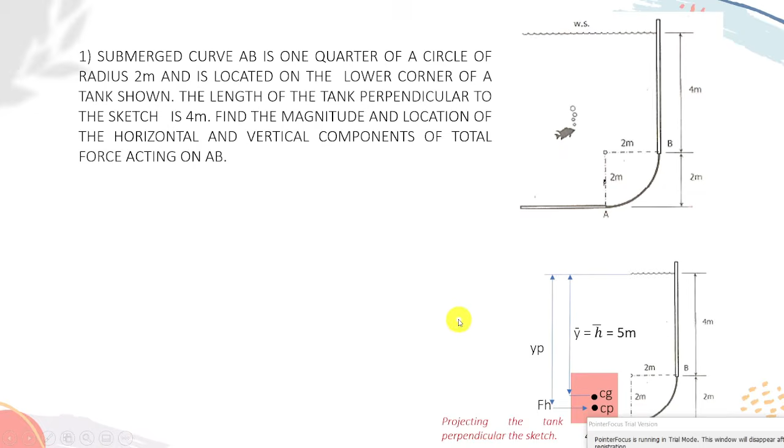For number 1, submerged curve AB is 1/4 of a circle of radius 2 meters and is located on the lower corner of a tank shown. The length of the tank perpendicular to the sketch is 4 meters. Find the magnitude and location of the horizontal and vertical components of total force acting on AB.

Ayan, tingnan natin itong figure. May isda pa, so ito yung water surface. Given naman na water, tapos ito yung gate na mag-act. And then, this is the curved surface of A to B, so that is a quarter of a circle, meaning 1/4 ng kabuuan ng isang circle.

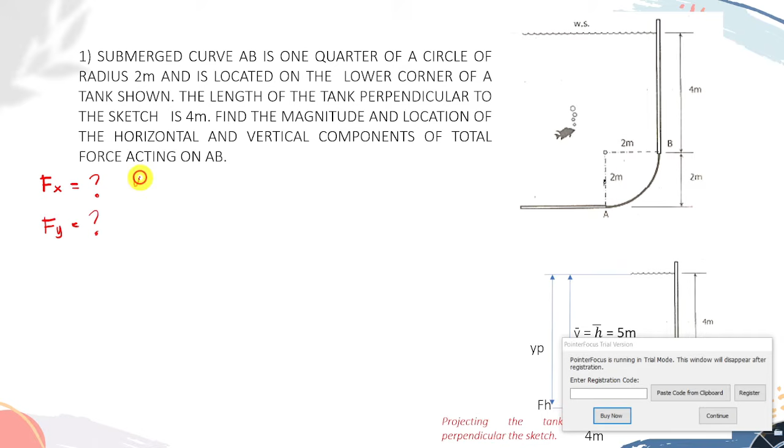So, ano yan? Isa-isahin natin ang hinahanap: the magnitude and location of the horizontal and vertical components. Therefore, nahanap ang horizontal Fx, vertical Fy, and the location as well. Sulat ko rin na hinahanap rin pala yung Yp saka yung kanyang x bar. Isahin natin.

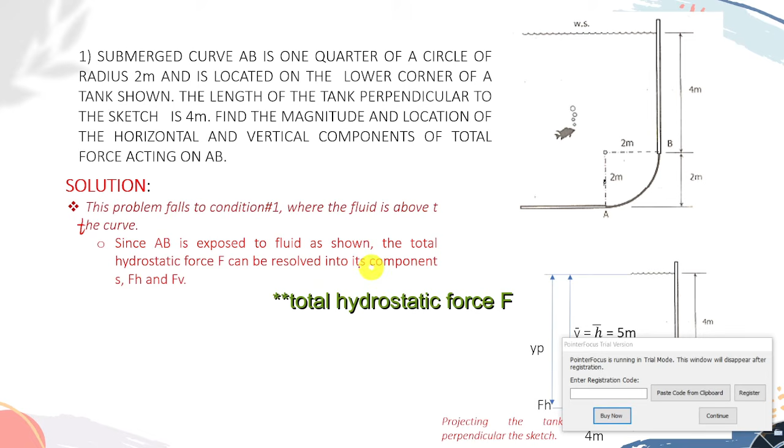This problem falls to condition number 1. Ano yung condition number 1? The fluid is above the curve. Since AB is exposed to fluid as shown, the total hydrostatic force can be resolved into its components, FH and FV.

So, ano yung condition number 1? Nasa taas, no? Nasa ibabaw siya ng liquid. So yung ating horizontal force na nag-act sa center of pressure, ang kailangan na muna nating unahin kasi mas madali yun. Diba? And later on, we will also get the vertical naman, ayan, Vertical FV or Fy in this case.

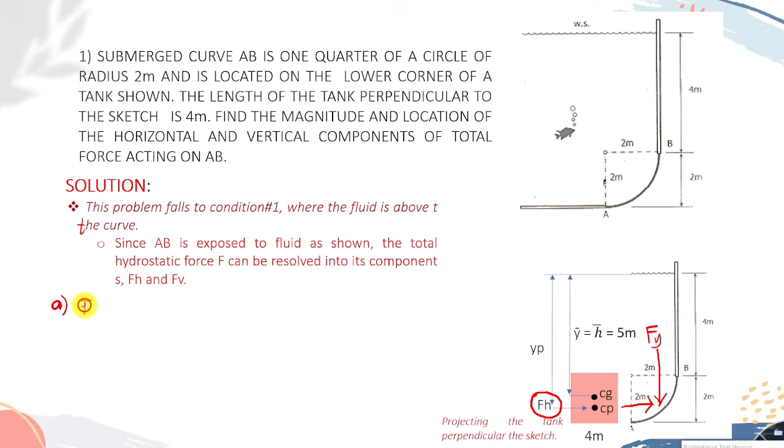So let us first solve for the horizontal component of the total hydrostatic force. Fx or Fh is equal to, yun lang talaga, basically yung gagamitin mo, gamma H bar A for horizontal. Step number 1 yun. Ano ang components niyan? We have unit weight, which is equal to 9.81 kilonewton per cubic meter. Saan yan galing? That is the unit weight of the water.

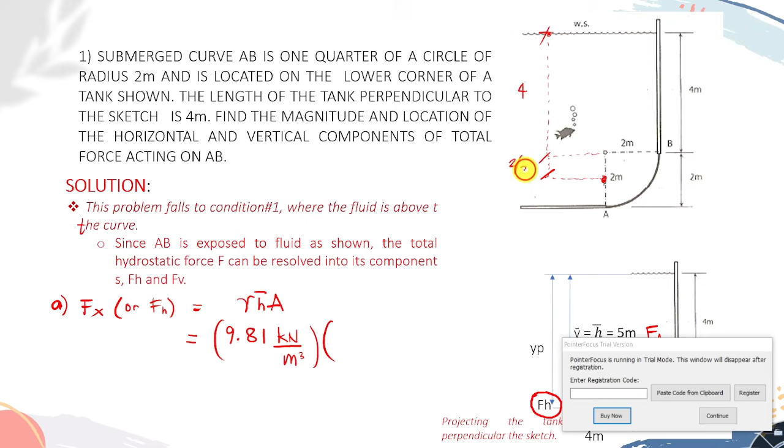Given naman the water, H bar. Now for H bar, again, H bar is the projected vertical distance from the water surface down. In this case, meron tayong given na 4 meter from water surface to B, plus, what is the projected centroid of that? Diba, rectangular lang. So ano ang kalahati niyang height na yan? That is 2 meter over 2, which is 1 meter plus 4 meters. So the total H bar is equal to 5 meters.

And what is the area? The area na i-consider natin is the projected, yung side view. Nagiven naman kasi na length of the tank is 4 meters. So, therefore, the height of 2 meters multiplied by the length of 4 meters. Yan na yun. So kung ipoproject ko siya isometrically, ganyan yan. Ang length na yan is the perpendicular to the paper, so 4 meters.

Now, to solve, calculating that, we have 9.81 by 5 by 2 by 4, and the answer should be 392.4 kilonewton, kasi makakancel out mo yung m cube divided by m cube. So ang matitira mo is a force, unit of force, 392.4 kilonewton. So yan is the horizontal pa lang, horizontal component of the force.

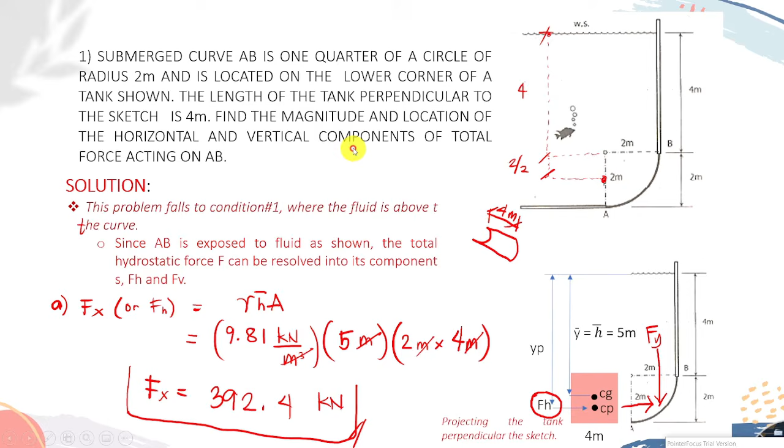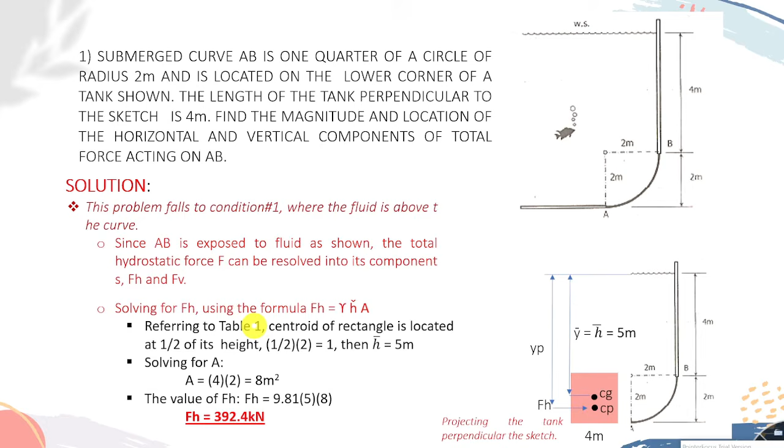Yan, basahin natin yung complete solution. Referring to table 1, centroid of rectangle is located at 1/2 of its height. So 2 over 2 is 1 meter. Then h bar is equal to 4 plus 1, 5 meters. Tapos, solving for area, we have 4 by 2 meters. And then the value of FH now is equal to gamma h bar A, 9.81 by 5 by 8, which is equal to 392.4 kilonewton.

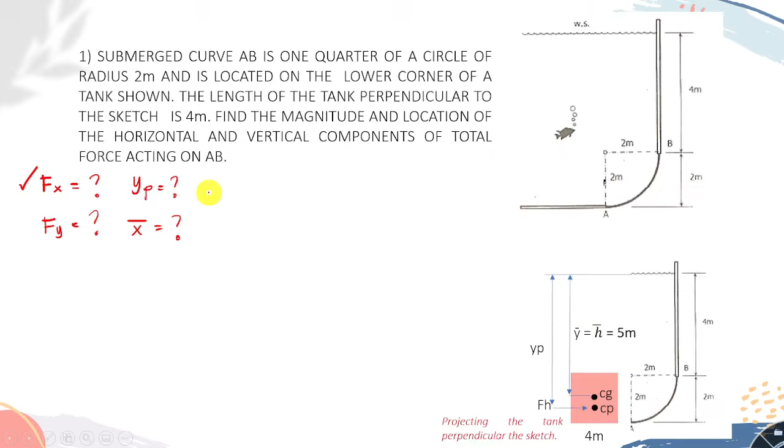So nakuha na natin kanina si Fx. Ngayon naman, hanapin natin ang location ng Fx na yan, which is also known as Yp. Solving for location of the horizontal force, that is, or Fx, ano yun? Yp ang hinahanap natin, okay, location. That Yp is measured from the water surface up to the center of pressure Cp.

Yan, yan yung projection niya, up. Nandyan somewhere yung horizontal force acting on the center of pressure. Now, to get Yp, we have to be familiar with, again, the formula for Yp from plane surface, y bar plus Ig over A y bar.

So yan lang. Ngayon, kailangan lang natin hanapin kung ano-ano ba yan. Ano ba yung y bar mo dyan? So in this case kasi, kapag project mo yung ating water surface to the center of gravity, Cg, projected vertically, ano makikita nyo? Parang yun din yung y bar niya, meaning 4 plus 1 meter, that is equal to 5 meter. Wala kasi siyang angle of inclination diba? So as is siya, na h bar is equal to y bar.

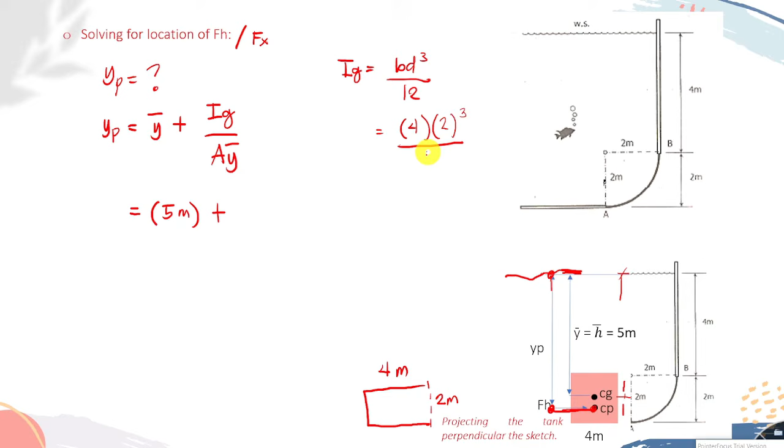Yan, galing yan doon wala nang tiginan ng table. So ang base mo dyan na kukonsider is 4 meter, while the depth na i-consider mo is 2, kasi yun yung height. So 4 by 2 cube over 12. Simplify ko lang, so 4 by 2 cube divided by 12 is equal to 8 over 3 m raised to the 4th power.

So i-substitute ko siya dito ulit, 8 over 3 m raised to 4 over, what is the area? The area you will consider is the area of the rectangle na yan, so that is yan, yung x niya. So 4 by 2.

And y bar, let me explain, is equal to... A y bar is 4 by 2 by 5 meters. So y bar is the projected parallel distance from the CG to the surface of the liquid. That's the 5 meters. Now we have complete values, let me just calculate. So 5 plus 8 over 3 over 4 by 2 by 5. Final answer is 5.07 meters.

That's the location of Fx, measured from the water surface to the center of pressure. That's y sub P.

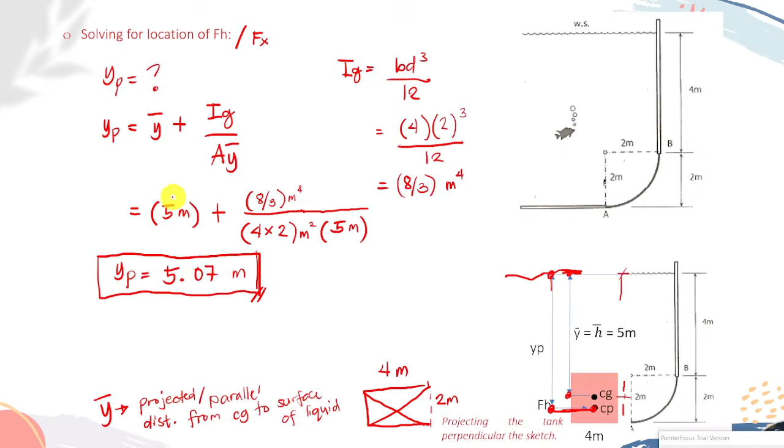Let's check. Okay, that's correct, right? So 5.067 - the location of FH is 5.07 below the water surface. So that's the first two.

Now, solving for FV using the formula. FV is the weight of water, since AB will carry the weight of the water above it. Again, this falls under case number 1, because the curve is above - I mean, the water is above the curved surface. So meaning, what it will carry as weight is the weight of the water. So no need for any imaginary things.

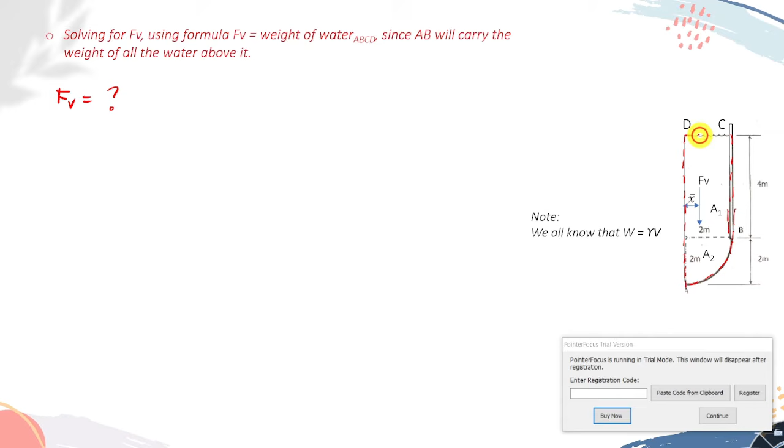So here, I'm drawing the projection of the water above the surface of the curve. As you can see, that one is the curved surface. Let me just write it down again.

So this is your gate - the shaded part, that is the gate from A to B. And I will project the line of the water above. So that's the volume we need to find.

So first, we have to find the area, from A, B, C, and D. Therefore, the vertical hydrostatic force is equal to unit weight multiplied by the volume of ABCD in the figure, as you can see. Okay?

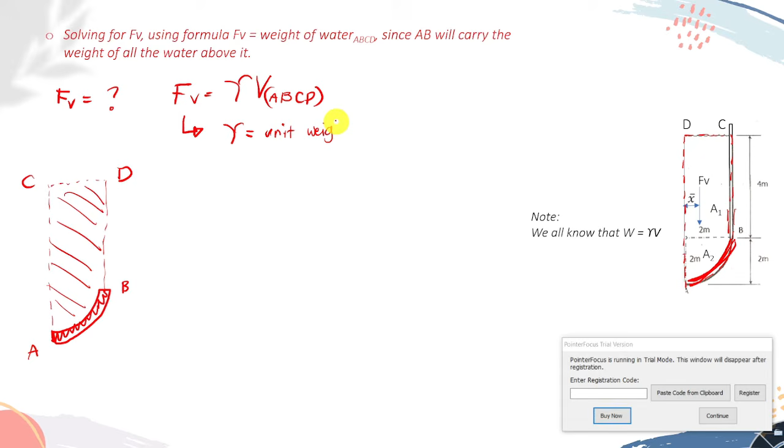Now we need to find the components. First of all, unit weight. Unit weight is a very simple given - that is the unit weight of the liquid, which is water, is equal to 9.81 kilonewton per cubic meter.

And then the volume of the said shaded area, that's what we need to find. We have a little problem here, okay? Volume ABCD. Now, to get that, here's another approach - can I divide this volume into 2 parts? Because it's hard to find when it's composite, right? So meaning it's comprised of two areas: area of a quarter circle and then area of a rectangle.

So I will put another letter, E. So this area, CDBE, is the area of the rectangle. Let me project it there. The length is 4 meters. Later I'll multiply by the length, because area by length is how you get the volume. There, it was projected like that.

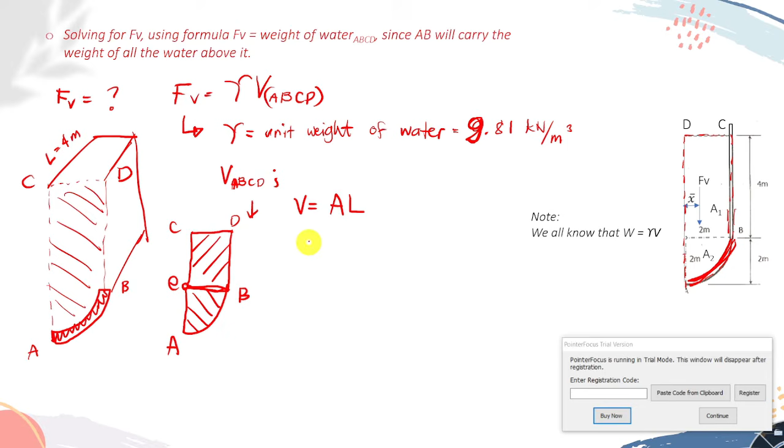So can I write that the volume is due to the area - the volume is equal to area by length. Now I will divide it into 2 parts again: area of CDBE multiplied by length, plus area of ABE multiplied by length. I divided it into two to make it easier.

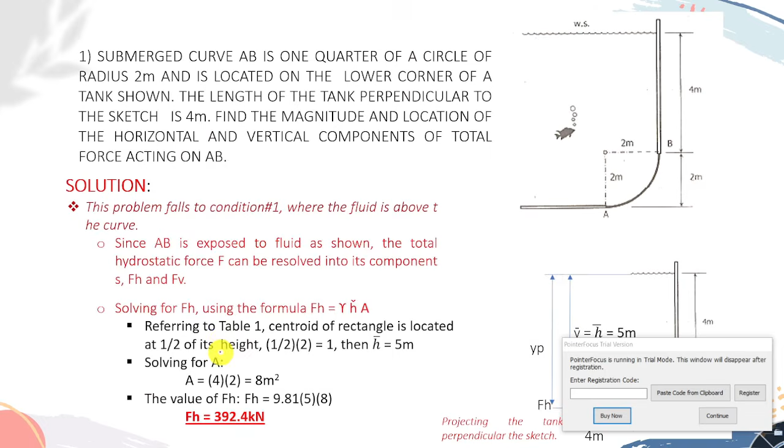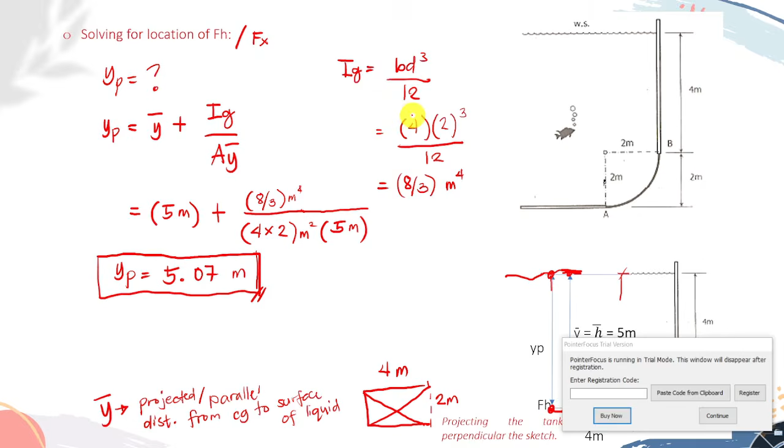Because we know the area of CDBE, that is the area of a rectangle, right? Yes, rectangle. And then ABE, from the problem, it's mentioned that this is 1/4 - a quarter of a circle. So meaning, quarter circle.

To make it easier to solve, let's dissect it into two parts to get the total volume. So what is the area of CDBE? The area of CDBE is a rectangle with height 4 meters and width of 2 meters. So 4 by 2 by what is the length? The length is perpendicular to the paper - that's 4 meters. So if you look at it in 3D, that's the hidden side.

And then, to get the area of ABE, we have to find the area of this quarter circle. What is the area of a quarter circle? Simply, that is pi r squared divided by 4 - the area of a circle is pi r squared, so if you divide that by 4, that's the area of the quarter circle. Multiplying that by the length of 4 meters again gives us the total volume. The volume of ABCD is equal to 4 by 2 by 4 plus pi 2 squared over 4, times 4. Now the total volume is 44.57 cubic meters. That's the volume.

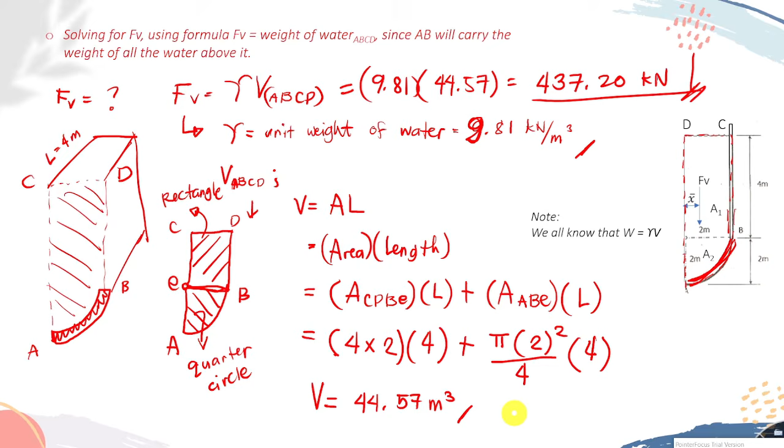Now we have the unit weight and we have the volume, I'll just multiply them together. So 9.81 by 44.57 cubic meters, we now get the total vertical force of 437.20 kilonewton. So that's how simple it is, right? You just have to find the area and the length, or simply the volume.

Let me read the cleaned-up solution again: 9.81 by 4 by 11.14 gives a total of 437.13. It's close because of rounding off on the area. So 437 is still the total vertical force.

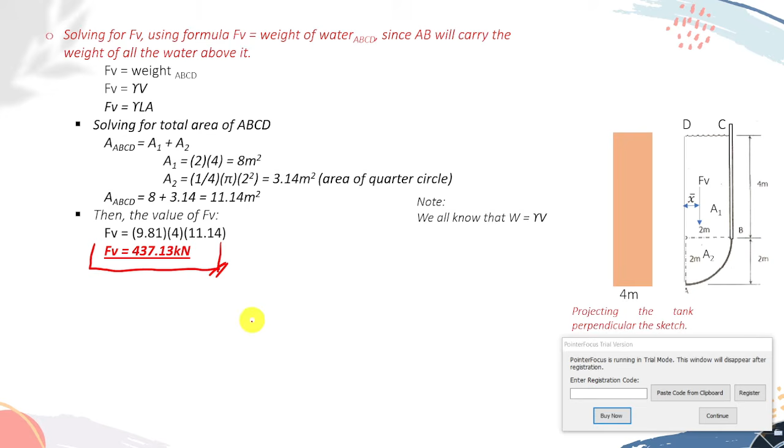So, for the next part, solving for the location of FV, we use the concept of Varignon's theorem, where the moment of the resultant is equal to the sum of the moments of its components. Or simply put, the location of FV, or the location of the centroid of ABCD, should be identified first using the method of geometric decomposition.

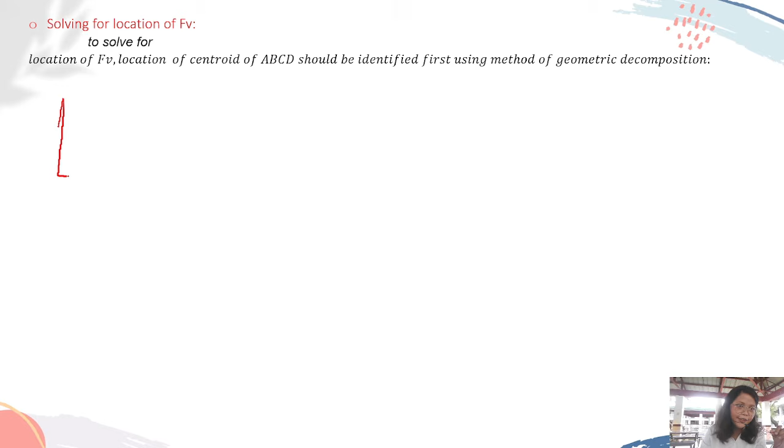Okay, let me go back to the figure. So this is ABCD. Let's say this is a rectangle, and this is a curve, a quarter circle. So we have one quarter circle and one rectangle. This is geometric decomposition.

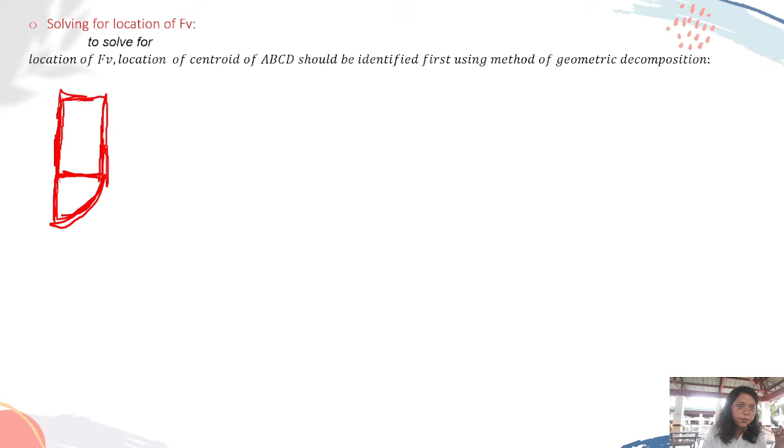From the word itself, decomposition means we divide the shape into several parts. So we have area number 1 and area number 2. In total, you get an irregular shape, but the sum is just two regular shapes: a rectangle and a quarter circle.

Now, let's insert here the concept of Varignon's theorem, that the sum of all moments is the sum of its components.

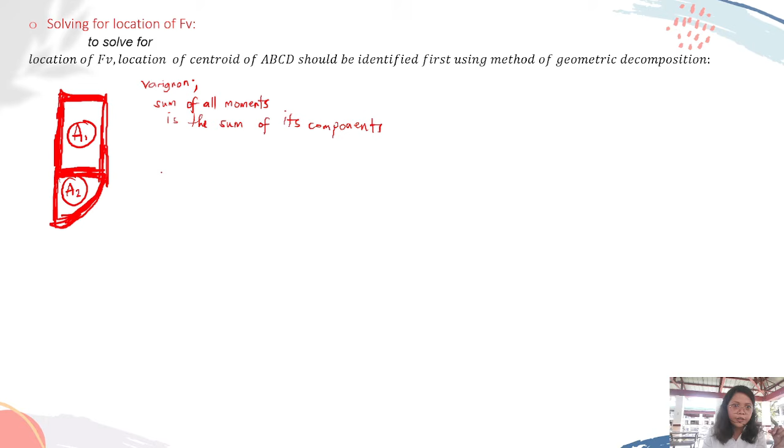So, how do you get the centroid? This is your area, and what is the location of the centroid with respect to x? The area multiplied by x bar — your area serves as the magnitude of the total area, and x bar is the location of your centroid. So x bar is your moment arm.

Then, think of it as if you're getting a summation of moments. So x bar is your moment arm, and area is your magnitude — magnitude of force, but we're not really talking about force here. We are just talking about area. That's why it becomes the sum of all moments, in this case, the sum of all areas multiplied by the moment arm.

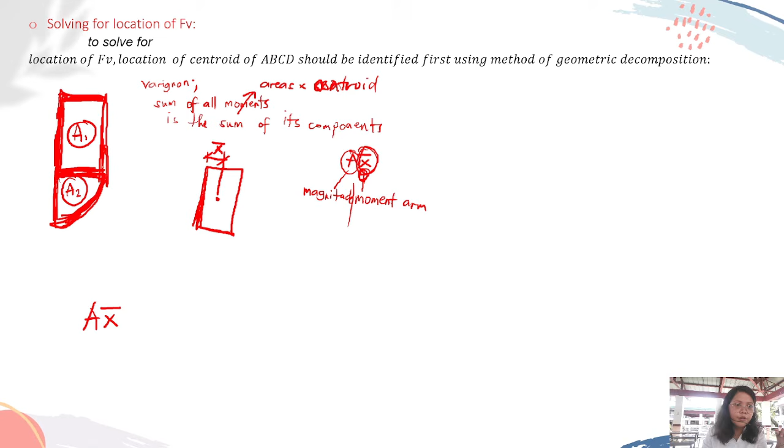It's just the centroid. So, the sum of everything — the area and the x bar, or the centroid of the composite figure — is equal to the summation of the smaller areas that make it up, which have regular shapes.

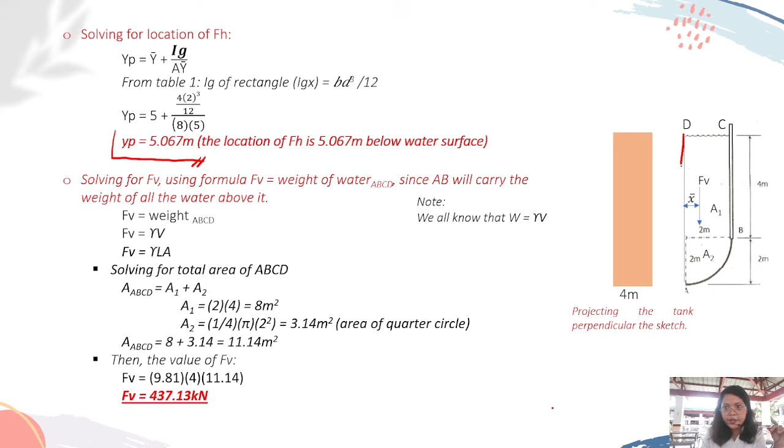So let's try it. What is area 1? From the figure, area 1 is 2 by 4, simply the area of a rectangle — 2 meters width and 4 meters height. So 2 by 4, that is 8 square meters.

And then area 2 here is the quarter circle. Let's go back to the figure. Your quarter circle is this, area 2. Therefore, area 2 is a quarter circle, which is 1/4 of the area of a circle, so that becomes 1/4 pi r squared.

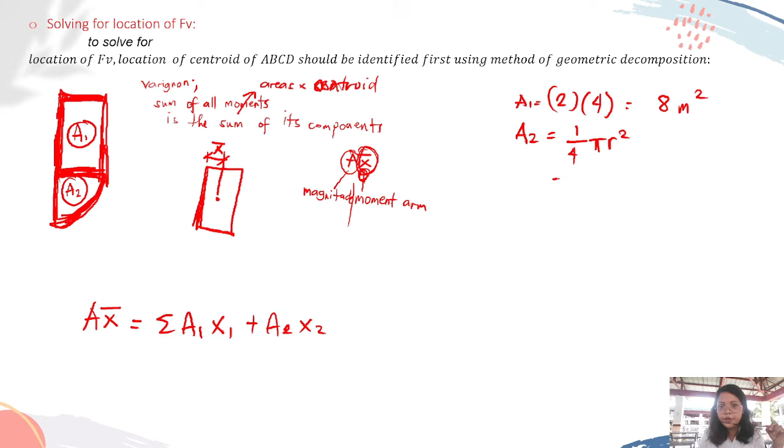I can say it's 1/4 pi r squared, where r is the radius. From the figure, the radius is equal to the height, which is 2 meters. So we have 1/4 pi times 2 squared. Simplifying, 2 squared over 4 gives 4 over 4, so it's just pi m squared. That is your area 2.

Let's enumerate the components. We have area 1 and area 2. What else? x1 — when we say x, that's the location of the centroid with respect to the x-axis. We already finished with the y-component, or the location of the vertical. Now, the location here is of course the x component.

Because the vertical force acts vertically, to get the location of its magnitude, that's x bar. Earlier, we got FV, and what we found before was the horizontal force, Fx. So that's how we got the location of y. Now, when we say the location of FV, we focus on X, or its horizontal component.

So X is equal to the centroid, the location of the centroid of everything involved. So, area 1 — what is the location of the centroid of a rectangle? For example, if this is the width and this is the length, it's always at the half, right? You probably already know that. For example, if our width is 2 meters...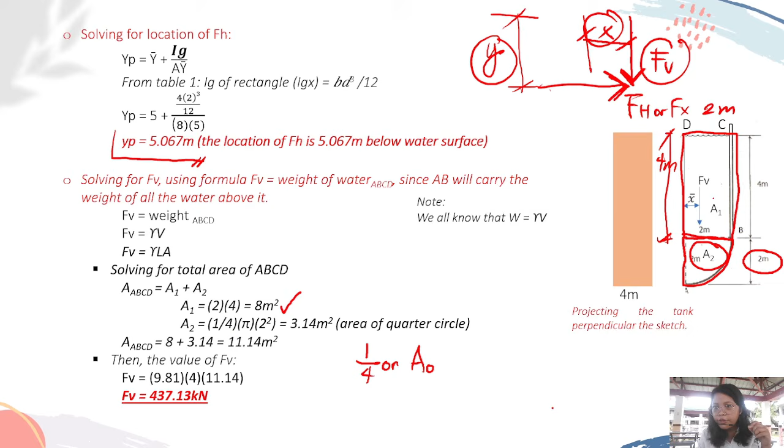Kung ang width mo dyan ay 2 meters, tas ang length mo is 4 meters, therefore ang location ng vertical centroid mo is 2 meters kasi kalahati, so 2 and 2. And ang location ng horizontal centroid o x nga is 2 over 2, ibig sabihin 1 and 1. Ang kukunin natin syempre yung x, yung 1. Kaya ang x1 natin dito is 1 meter.

Pagdating natin sa x2, ano ba tong component nito? This is a quarter circle, so meaning ang kanyang centroid is somewhere out here. So ito yung location ng X2, tapos dito naman yung location ng Y2. Paano natin malalaman yan ngayon?

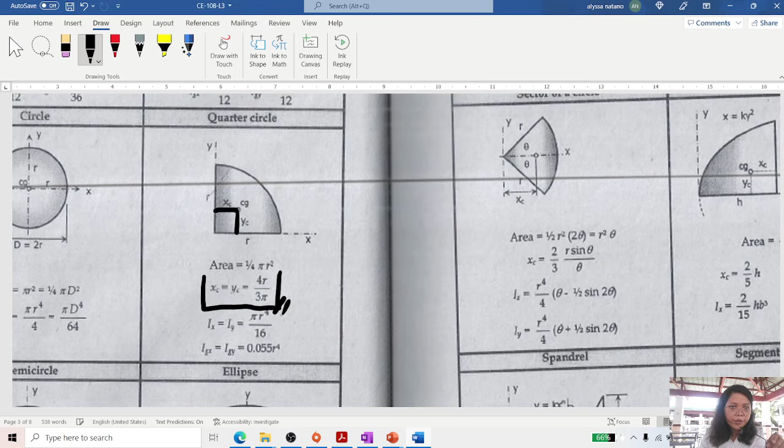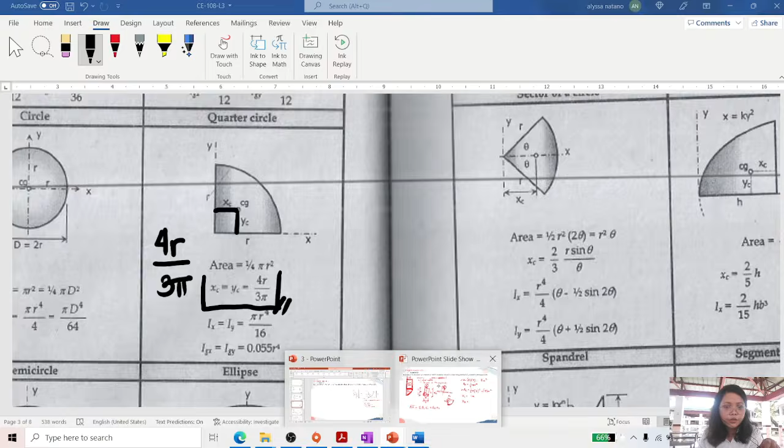Dapat familiar tayo sa geometry, sa geometrical composition ng isang bagay-bagay. So the location of the quarter circle, zoom ko lang konti. The location of X and Y, nasa table naman, pero kahit hindi kayo tumingin sa table dapat alam nyo na yan. So 4R over 3 pi, pareho siya, XC and YC, di ka malilito kasi pareho. Pero yung kukunin mo kasi is yung X, na also equal to 4R over 3 pi.

Pwede ko na siyang isulat dito, 4R over 3 pi, that is 4 by, the radius is 2 meters, over 3 pi. Yan na. Wag na natin i-simplify kasi magiging decimal.

So meron na tayong A1, A2, X1, X2. Substitute ko na siya dito sa ating main formula. Ang A mo dito is the area total, ibig sabihin lahat na, A1 plus A2. Pwede ko siyang isulat as 8 plus...

8 plus A2 is 1/4 pi by 2 squared, so that is pi m squared, multiplied by x bar. X bar nga yung ating hinahanap, so that is still unknown. Tapos is equal to the summation of area 1 times x1, area 2 times x2. Susulat ko na lang siya: 8m squared by what is your x1? X1 is 1 meter, plus area 2 is pi over 4 times 2 squared or pi.

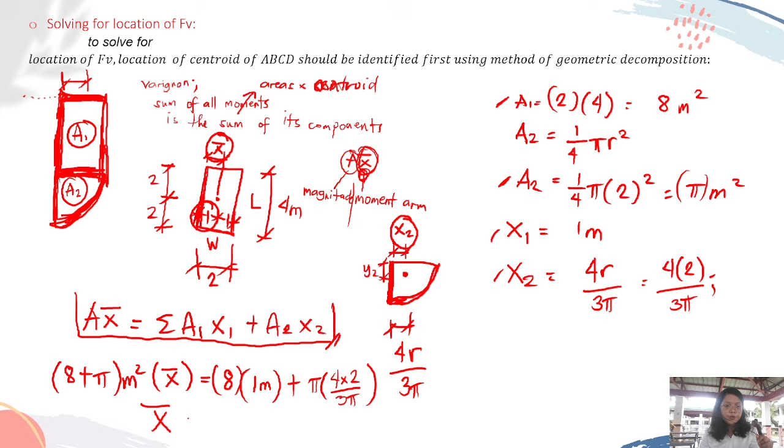So pi multiplied by x2, which is 4 by 2 over 3 pi. Shift solve na lang yan. We have here 8 plus pi by x is equal to 8 plus pi by 4 by 2 over 3 pi. Shift solve, the final answer should be 0.957 meters. So the location of the centroid of ABCD is somewhere out here, that is 0.957 meters. Yun na yung location ng FV.

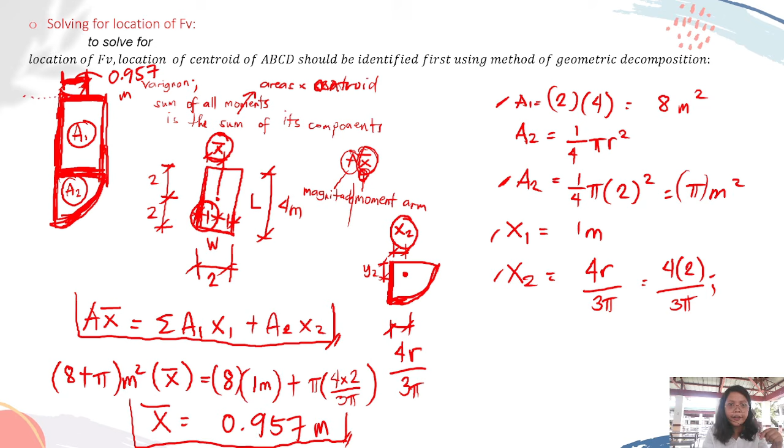Tingnan nga natin sa tamang formula. Naka-isolate yung kanyang drawing, area 1 and then area 2, yung quarter circle. So the location of x1 and then x2, which is nakuha na natin. Ibig sabihin, nung nagkaroon na tayo ng summation of area multiplied by the location of centroid x, we get x bar, o simply, x bar is equal to 0.957 meters. Final answer, 0.957.

Acting at the right of A. Okay din na maglagay kayo ng words o phrases para saan nyo siya nilocate. Pwede kasi magsimula kayo dito sa left, pwede rin sa right. Anyway, nakuha naman tayo, ang reference point natin is here to here. Kung magre-reference point ka, dapat consistent ka. Kung dito ka galing, lahat ng location mo nandito din, from here to here. Kung dito ka naman sa B, from B to ganito. Kung ito yung B mo, dyan ka dapat, to the left, to the right.

So consistency. Yun lang naman nakuha na natin si YP, si X bar, si F of X, saka si F of Y. Ito ang magkakatandem dyan, always.

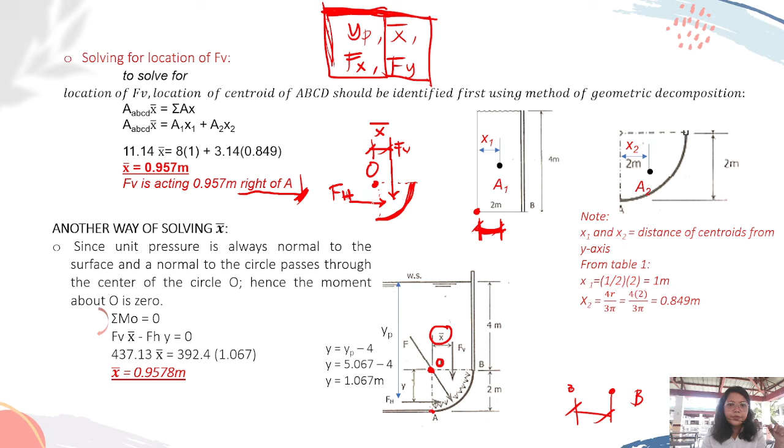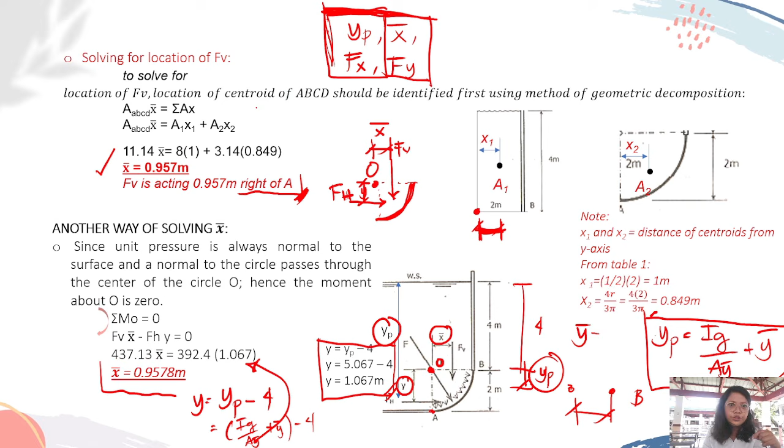Yun yung Y, so Y is YP minus 4 meters. Tapos i-substitute mo na lang yung IG over AY bar, AY bar plus Y bar minus 4 meters. Kaya nakuha yung 1.067. Ito na pala, ayan, so 1.067. Tapos makukuha mo din same answer as yung summation ng area tapos summation of moment.